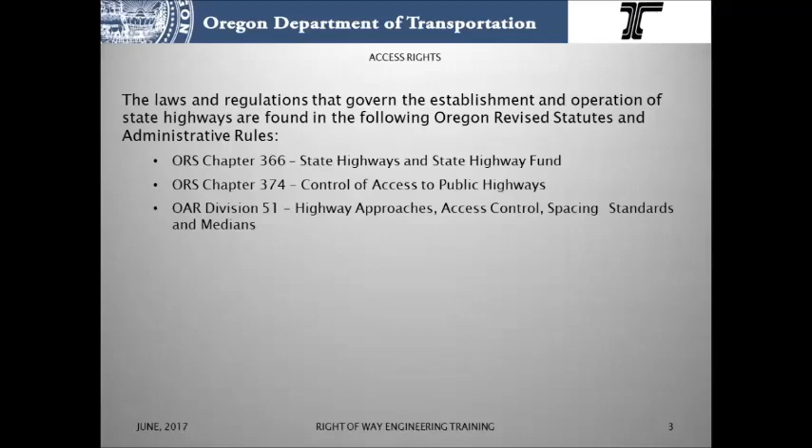Let's start with the administrative rules. In Division 51, 734-051-0020 gives the Department of Transportation the authority to regulate and establish rules that pertain to approaches, access control, spacing standards, medians, and restriction of turning movements.

In 051-1070, there are definitions that you should be aware of. Number one, access control. That means no right of access exists between a property abutting the highway and the highway. Now, this right of access may have been acquired by the department or eliminated by law.

Alternate access means the physical existence of other means to access a property other than the proposed approach, such as an existing public right-of-way, another location on the subject state highway, an easement across the adjoining property, a different highway, service road, or an alley. Now, an approach means a legally constructed approach road or private road crossing, recognized by the department as grandfathered or existing under a valid permit to operate.

A grandfathered approach means a legally constructed approach existing prior to 1949. Now, a property owner has the burden to prove an approach is grandfathered based upon its existence prior to 1949.

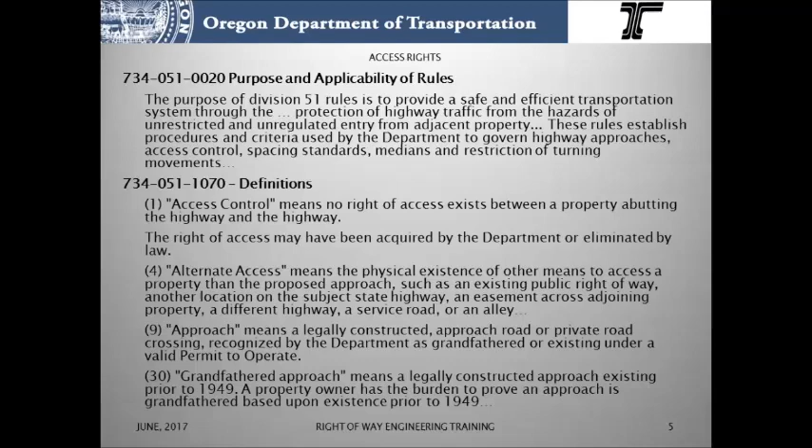Grant of access means the conveyance or evidence of the conveyance from the department of a specific right of access at a location where an abutting property currently does not have that specific right of access.

Indenture of access means a deeded conveyance that changes the location, width, or use restrictions of an existing reservation of access. Reservation of access means a limitation of a common law right of access to a specific location where the department has acquired access control subject to restrictions that are designated in a deed.

A reservation of access may include a use restriction limiting the right of access to a specified use, or a restriction against a specified use. A reservation of access affords the right to apply for an approach, but does not guarantee approval of an application for a state highway approach or the location of an approach.

Now, right of access means the right of ingress and egress to the roadway, and includes a common law right of access, reservation of access, or grant of access. Right of way means real property or an interest in real property owned by the department, as defined in the 1999 Oregon Highway Plan.

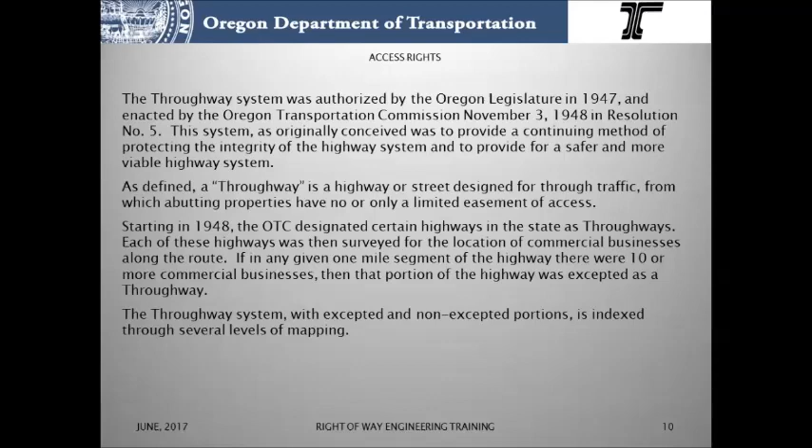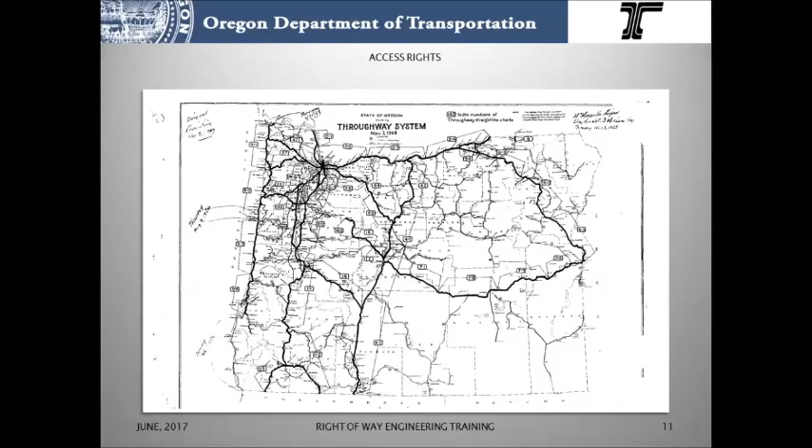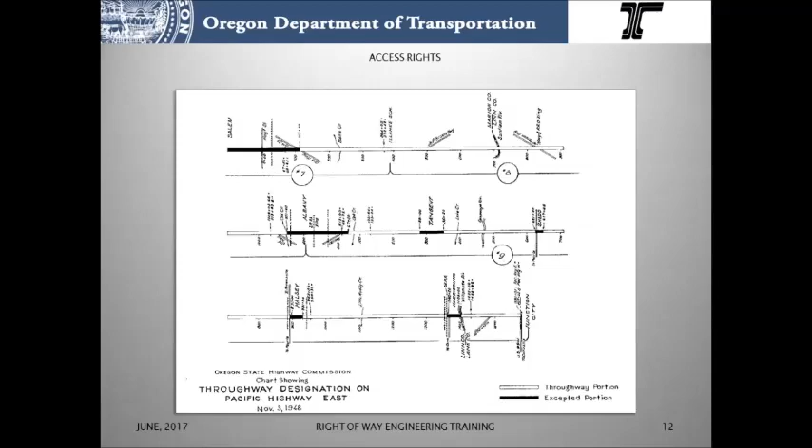374.010, throughway defined. As used in 374.005 to 095, throughway means a highway or street especially designed for through traffic, over, from, or to which owners or occupants of abutting land or other persons have no easement of access, or only a limited easement of access, light, air, or view, by reason of the fact that their property abuts upon the throughway, or for any other reason.

.015 allows the Department of Transportation to establish and maintain the throughways. Any relocated section of an existing highway, and such portions of existing highways which at the time they are designated as throughways have less than 10 commercial businesses abutting thereon catering to the motoring public in any 1 mile of such existing highway, may be designated and constructed as or converted into a throughway.

Now in 035, the Department of Transportation may acquire, by agreement, donation, or the exercise of the power of eminent domain, fee title to, or any interest in any real property, including easements of air, view, light, and access, which in the opinion or judgment of the Department is deemed necessary for the construction of any throughway.

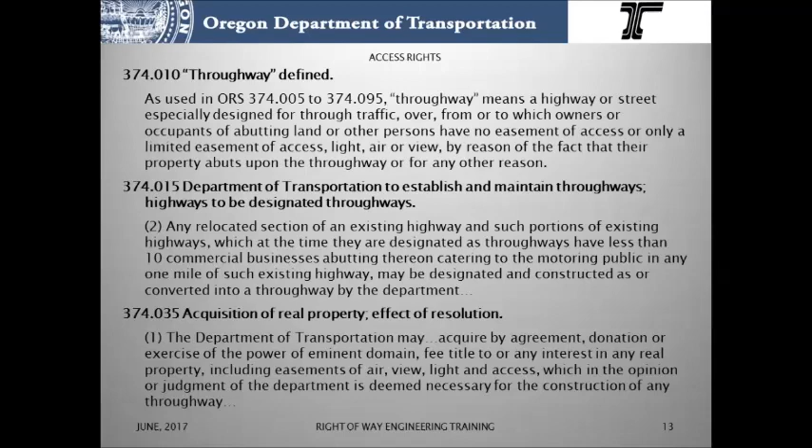Now, 085 and 090 deal with agricultural land. So in 085, severance by throughway of agricultural land: wherever by the location, relocation, establishment, construction, or reconstruction of a throughway, real property, title to which is held under one ownership, is severed and land is being used for farm or other agricultural purposes, provision shall be made by the Department for crossing the highway from one such tract to the other, or compensation for the severance of the tract shall be paid.

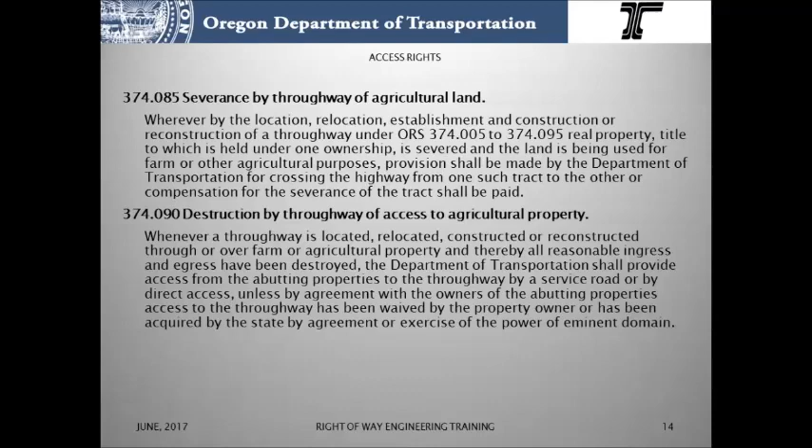This is our farm crossing easements. Now in 090, destruction by throughway of access to agricultural property. Whenever a throughway is located, relocated, constructed, or reconstructed through or over farm or agricultural property, and thereby all reasonable ingress and egress have been destroyed, the Department of Transportation shall provide access from the abutting properties to the throughway by service road or by direct access, unless by agreement with the owners of the abutting properties, access to the throughway has been waived. So this is just a farm access.

Now in 095, utility roads. So we have any existing highway or section of existing highway converted into a throughway. By reason thereof, real properties then occupied and used are affected, and such abutting real properties are dependent upon the existing highway or section of highway for ingress and egress. The Department of Transportation shall provide a utility or service road to serve the properties. This is our frontage road authority.

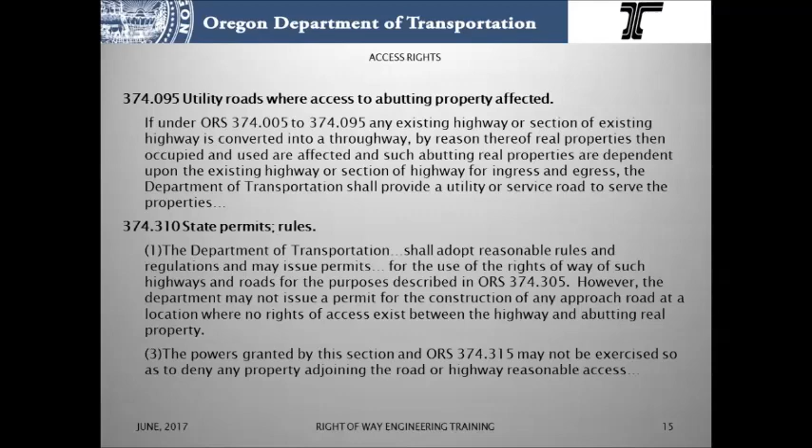And then in 310, this allows the Department to adopt reasonable rules and regulations and may issue permits for use of the rights of way of such highways and roads for the purpose described in 374.305. So basically this gives us the authority to issue permits for approach roads. Now, no abutters' rights of access, the 1951 law.

374.405, access rights of property abutting on state highways. No rights in or to any state highway, including what is known as right of access, shall accrue to any real property abutting upon any portion of any state highway constructed, relocated, or reconstructed after May 12, 1951.

Upon right-of-way, no part of the width of which was acquired prior to May 12, 1951, for public use as a highway by reason of the real property abutting upon the state highway. And ORS 410, in connection with any acquisition of real property for right-of-way of any state highway, the Department of Transportation shall prescribe and define the location, width, nature, and extent of any right of access that may be permitted by the Department to pertain to real property described in 374.405.

So what this means: we have a new highway route. We're taking off from an existing highway, relocating through new lands, a new route. That 1951 law specified that the abutting property owners have no right of access to the new route, but we can specify a reservation if needed.

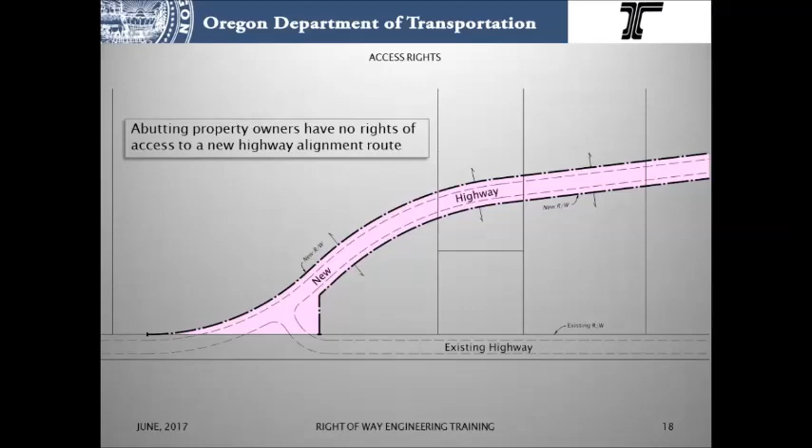So regardless of a property owner's common law rights, an adjoining property owner must always obtain a permit from ODOT to access the highway. In addition to ODOT's acquisition of any property rights or the effect of state laws, the regulatory permitting power gives ODOT full authority to manage and control all highway access.

The type of access rights, if any, that are to be acquired are identified and noted in the addenda information for the acquisition file. Key phrases are used that tell the document specialist the specific access language to put in the deed for each parcel of the description.

So the access language that is used is: none, restricted to highway, controlled to highway, restricted the parcel, controlled the parcel, uncontrolled frontage road, controlled frontage road, restricted frontage road, controlled to highway with future frontage road, ORS 374.405 no abutters rights of access complete restriction to highway, ORS 374.405 no abutters rights of access with reservation of access granted, joint access, farm crossing, and undercrossing.

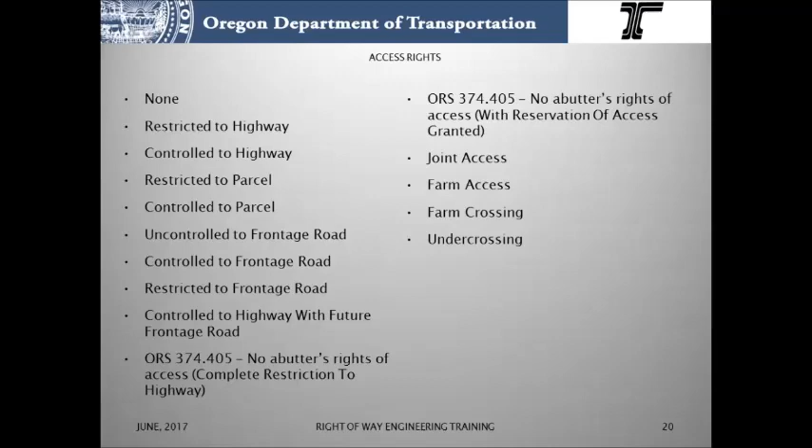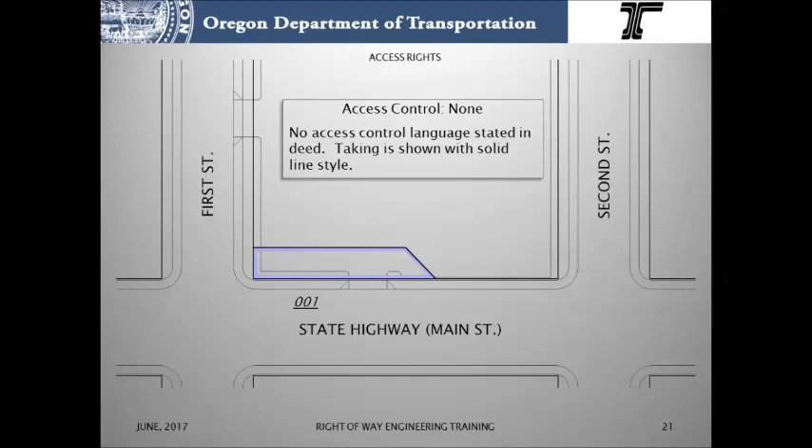Let's take the first one. Access control: none. No access control language is stated in the deed. The taking is shown on the map with a solid line style.

So there's the addendum note that the writer is going to put in the addendum. It says parcel number, access language: none. And no specified access language goes in the deed.

Application of this is all existing access rights, if any, between the grantor's remaining real property and the highway will remain. If ODOT has never purchased any access rights from this property, then highway access will continue to be regulated solely by ODOT's permit process.

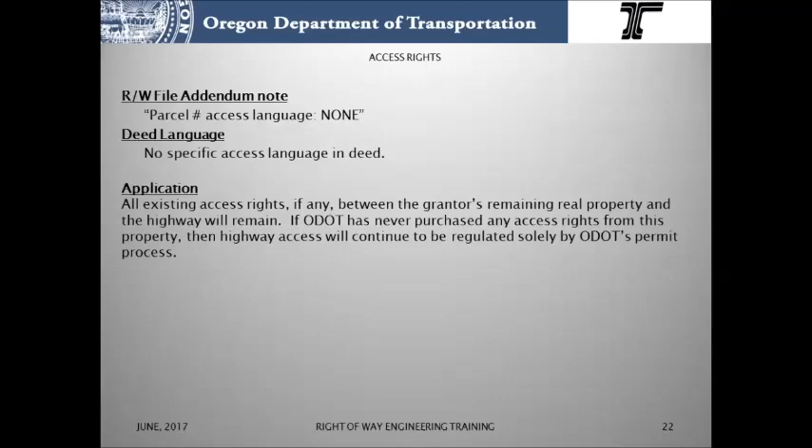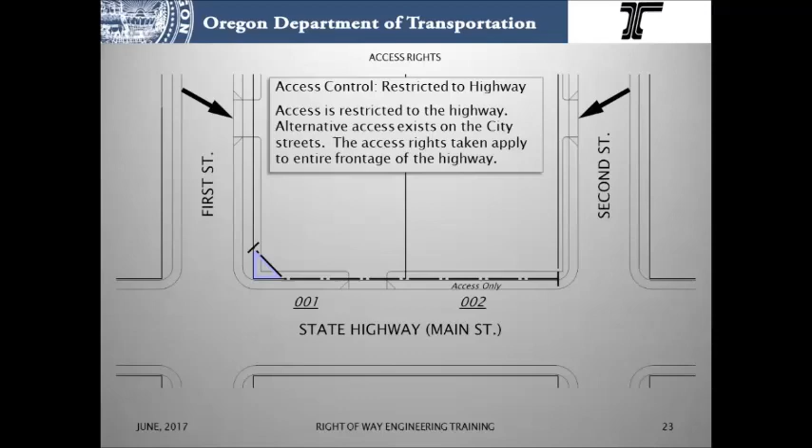Now we have access control restricted to highway. So access is restricted to the highway. Alternative access exists on the city streets. The access rights taken may apply to the entire frontage of the highway. Access rights that are taken may be incorporated with a fee-taking parcel, or it may be a separate access-only parcel.

So with file 1, we have a small triangular shaped fee take, but we're acquiring the rights to access along their entire frontage. With file 2, it's just an access-only file. There's no other taking.

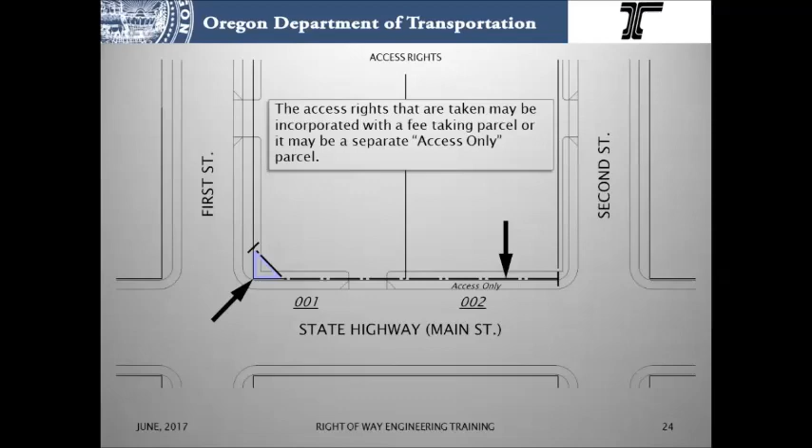So the note on this is parcel number, access language: restricted to highway with the highway name. That clues into the document specialist. They put this deed language in the deed: together with all abutters' rights of access between the name of the highway and grantor's remaining real property.

Our application is no access reservations are identified. Access between the grantor's remaining property and the highway is completely prohibited. The grantor's property can only be accessed from another public road or street. This is the method for eliminating access rights between the grantor's property and the highway when the parcel does not span the full frontage of the property.

Next one, access control: controlled to highway. So we have no alternative access to the properties that exists. So a reservation of access is granted in the deeds.

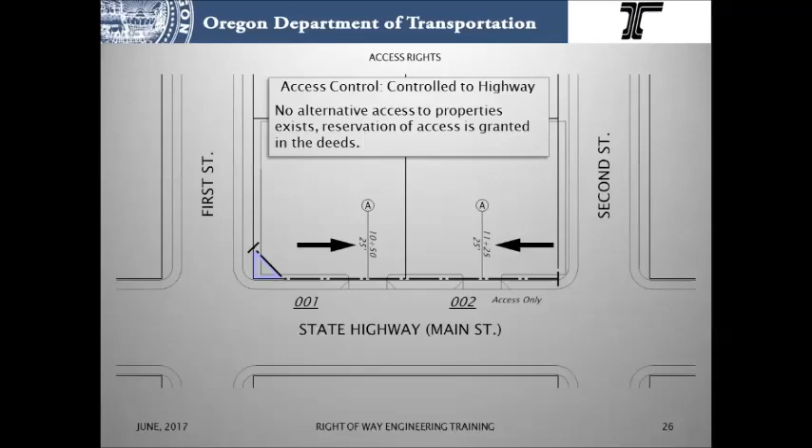The note for this one is parcel number, access language: controlled to highway with the highway name. The deed language that goes in is: together with all abutters' rights of access between the name of the highway and grantor's remaining real property, except however, and then we put in reservation language, reserving access rights for the service of grantor's remaining property to and from said remaining property to the abutting highway at the following place or places in the following width or widths.

We have the engineer station identified, which side of the highway, and the width of the approach. So the application of this one is all access rights between the highway and grantor's remaining property with reservations of access. Project team is to provide the reservation stations, which side of the highway, and the width of the reservations.

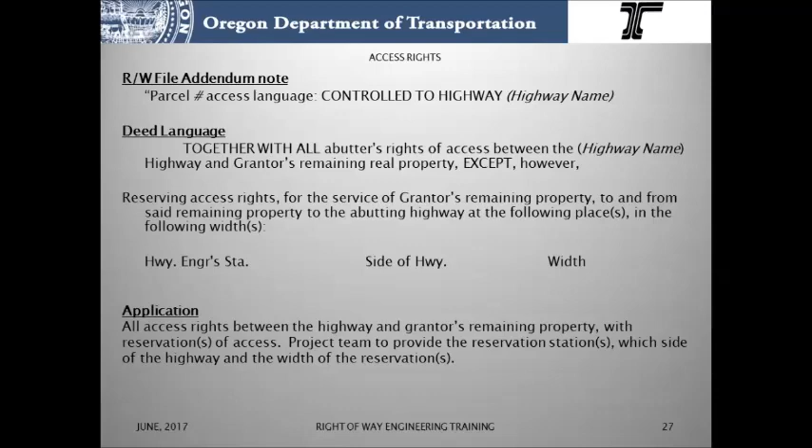Next one, access control restricted to parcel. So access restricted to the parcel. There is alternative access that exists on the city street.

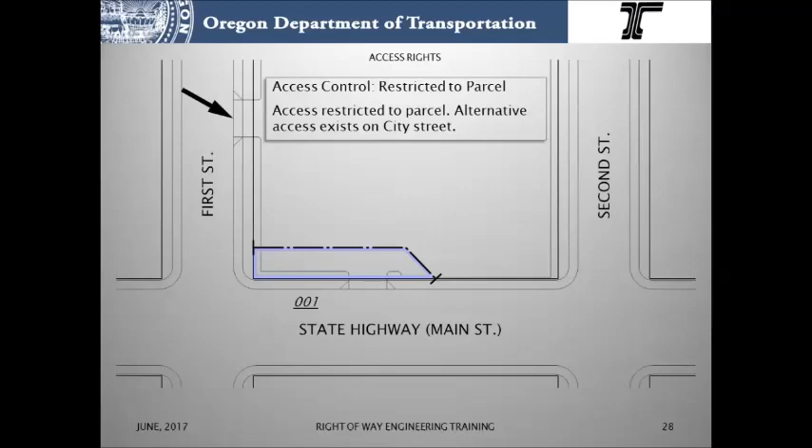The addendum note: parcel number, access language, restricted to parcel. The deed language that goes in is together with all abutters' rights of access between the above described parcel and grantor's remaining real property. The application: no access reservations are identified.

Access between the grantor's remaining property and the parcel is completely prohibited. All existing access rights, if any, that are not via the parcel will remain. This is the method for eliminating only the access rights through the parcel when the parcel does not span the full frontage of the property.

This is the preferred method for eliminating all access rights between the grantor's property and the highway when the parcel spans the full frontage of the property.

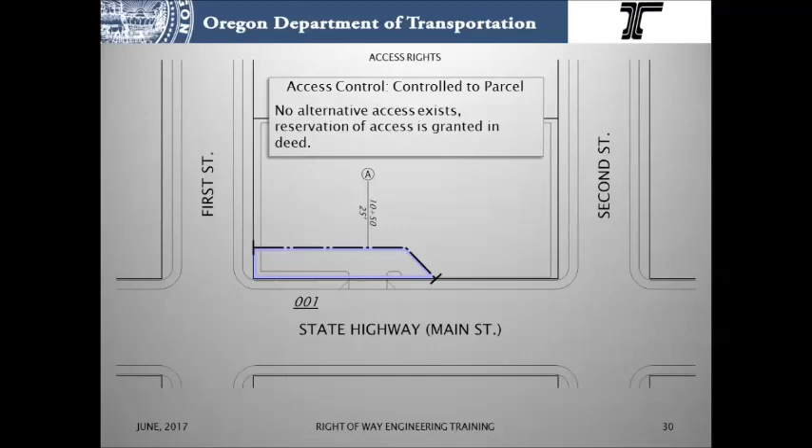Next one, access control, controlled to parcel. No alternative access exists. A reservation of access is granted in the deed.

The note: parcel number, access language, controlled to parcel. The deed language is together with all abutters' rights of access between the above described parcel and grantor's remaining real property, except, however, and then we have the reservation language with the station, which side of the highway, and the width. So the application: all rights between the described parcel and grantor's remaining property with reservations of access.

Project team to provide the reservation stations, which side of the highway, and the width of the reservations.

So access to a frontage road is addressed as with access to the highway. It can be restricted, controlled, or uncontrolled. The access language notes for frontage road to be entered in the addenda information for the acquisition are: uncontrolled the frontage road, controlled the frontage road, restricted the frontage road.

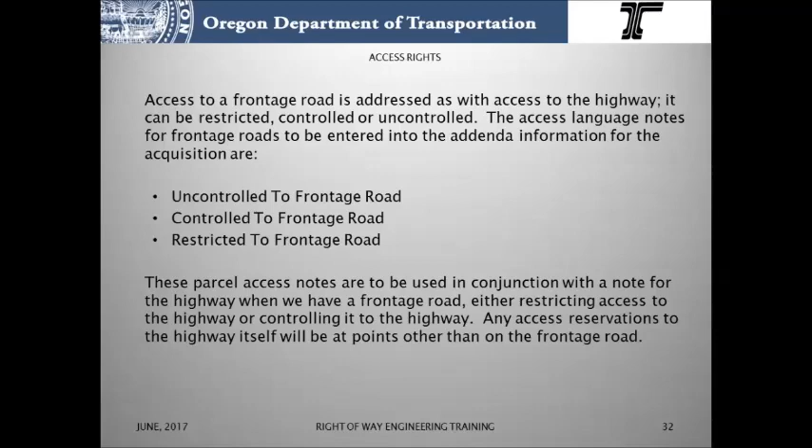These parcel access notes are to be used in conjunction with a note for the highway when we have a frontage road, either restricting access to the highway or controlling it to the highway. Any access reservations to the highway itself will be at points other than on the frontage road.

So the first one we have, access control: restricted the highway, uncontrolled the frontage road. All access rights between the highway and grantor's remaining property with access uncontrolled to a public frontage road to be built during the project or some other public access road.

The addendum note: parcel number, access language, restricted the highway with the highway name, uncontrolled the frontage road. So the deed language that goes in: together with all abutters' rights of access between the name of the highway and grantor's remaining real property, except, however, grantee shall either construct a public frontage road or provide some other access road on the, and then it's a direction, side of the highway, and grantor and grantor's heirs, successors, and assigns

shall be entitled to access to said road for any purpose upon application filed with grantee and issuance of a road approach permit pursuant to applicable statutes and regulations. Said road shall be connected to the main highway or to other public ways only at such places as grantee may select.

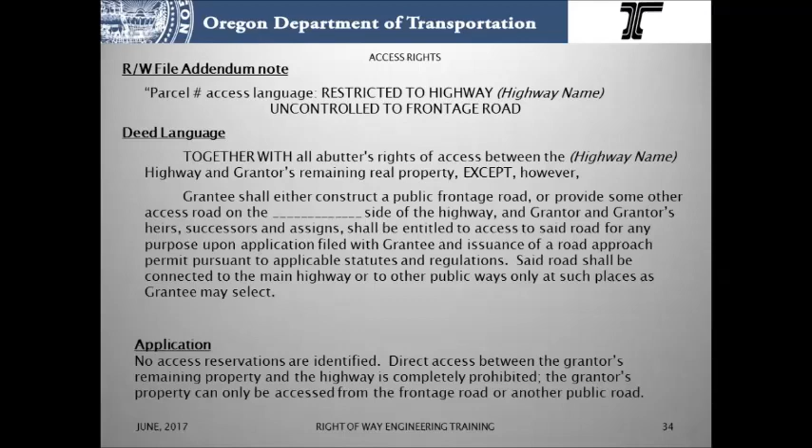Next one is access control, restricted the highway, controlled the frontage road. So access to the highway allowed only via a public frontage road. Reservation of access granted to the frontage road.

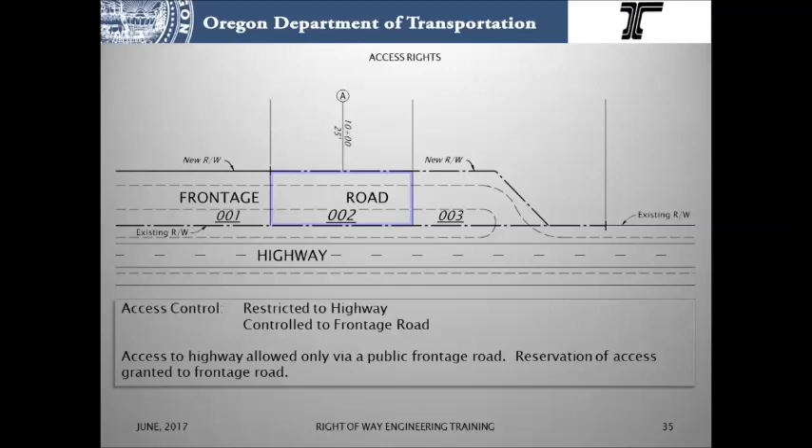Okay, the access note: parcel number, access language restricted the highway with the highway name, controlled the frontage road. The deed language is together with all abutters' rights of access, if any, between the highway name and the grantor's remaining real property. Also together with all abutters' rights of access, if any, between the frontage road and grantor's remaining real property,

except, however, then we're reserving access rights for the service of grantor's remaining property to and from said remaining property to a public frontage road or other public access road, which grantee shall construct at the following place and the following widths. And then we have the station, which side of the highway, and the width.

Application on this: all access rights between the highway and grantor's remaining real property with access controlled to a public frontage road or some other public access road to be built during the project. The team provides the reservation station, the side of the highway, and the width.

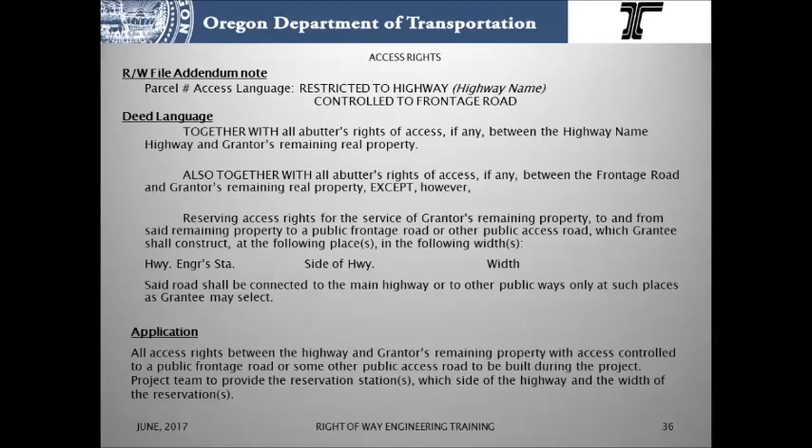Next one is access control, restricted the highway and restricted the frontage road. And with this one, the access to the highway and the frontage road is completely restricted.

The addendum note: parcel number, access language, restricted the highway with highway name and restricted the frontage road. Deed language: together with all abutters' rights to access between the highway with the highway name and constructed public frontage road or other public access road and grantor's remaining real property.

Application is all access rights between the highway, including the constructed public frontage road or other public access road, and grantor's remaining property.

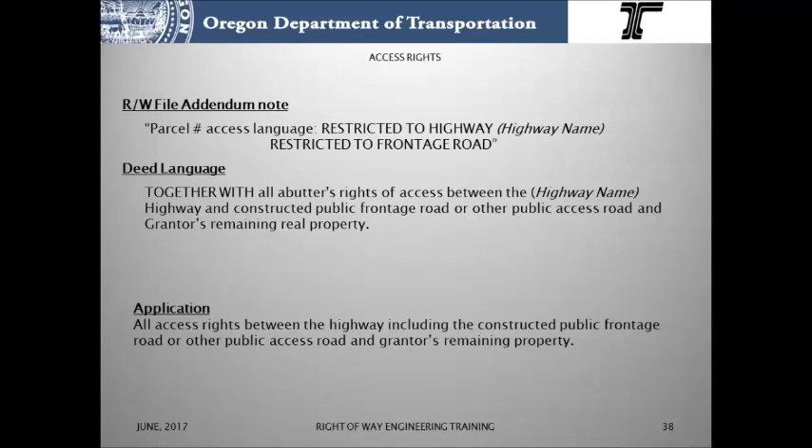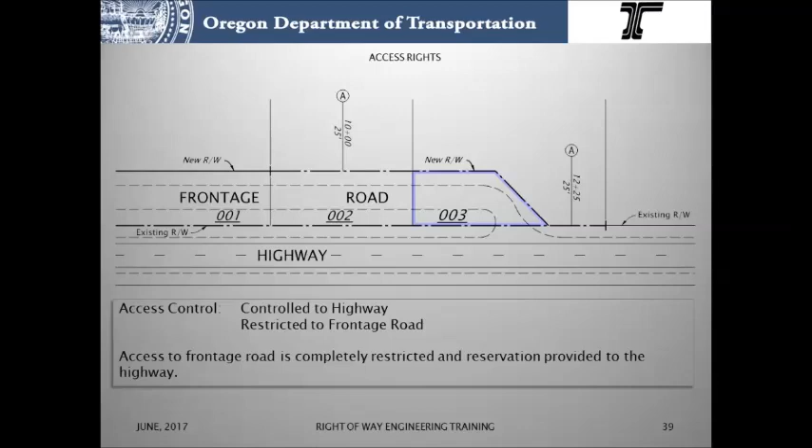This one controlled the highway and restricted the frontage road. Access to the frontage road is completely restricted, with reservation provided to the highway. The note is parcel access language: controlled the highway with the name of the highway, restricted frontage road.

Deed language: together with all abutters' rights of access between the named highway and constructed public frontage road or other public access road and grantor's remaining real property, except, however, reserving access rights for the service of grantor's remaining property to and from said remaining property to the abutting highway at the following place and widths. So all access rights on this one are between the highway and public frontage road or other public access road and grantor's remaining real property, with a reservation of access to the highway.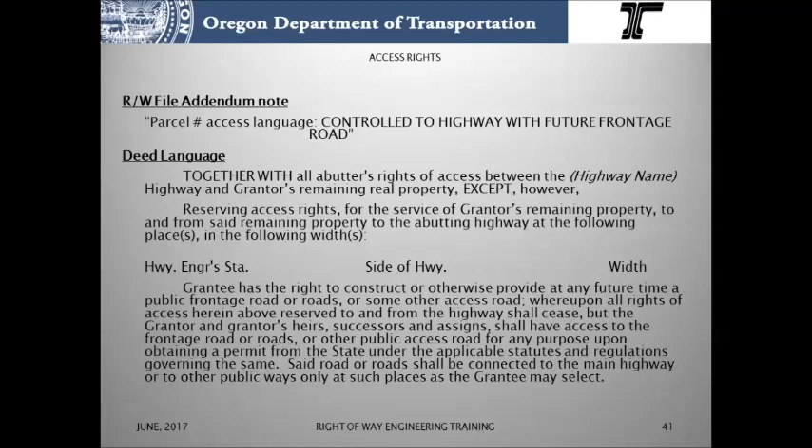Application of this one: the grantee has the right to construct a future frontage road or other public access road, at which time all reservations to the highway shall extinguish, and grantor will be granted a reservation to the constructed frontage road or public access road. The project team is to provide the reservation station, the side of the highway, and the width.

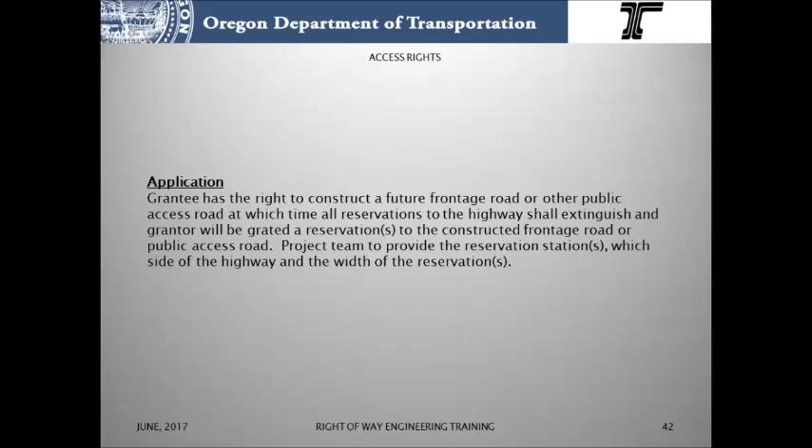Now we go into access control, joint access. Property A and Property B share a common driveway, and no alternative access exists. The reservation is granted serving both of the properties.

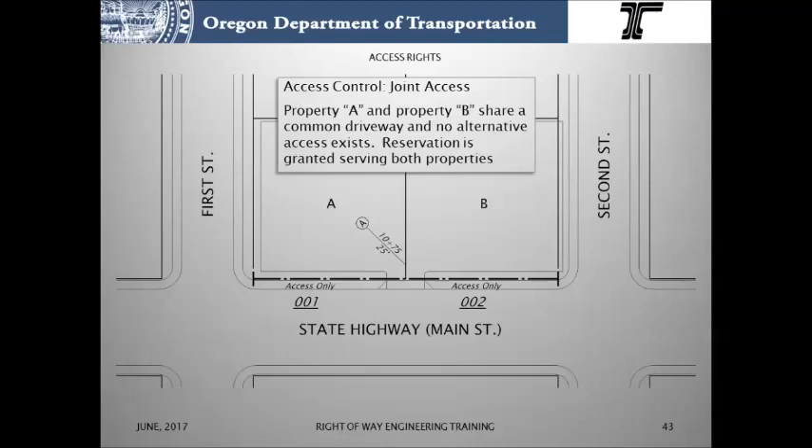The note on this one is parcel access language, controlled highway, with the highway name, with joint access. The deed language is: together with all abutters' rights of access between the named highway and grantor's remaining real property, except, however, reserving access rights for the service of grantor's remaining property to and from said remaining property to the abutting highway at the following place and widths.

Standard reservation language there. Additional note: it is specifically understood that the access rights opposite highway engineer station, with the station specified, are to be used and enjoyed in common with the adjoining property owners on the north, south, east, or west, who currently is/are, and then the name of the adjoining property owner.

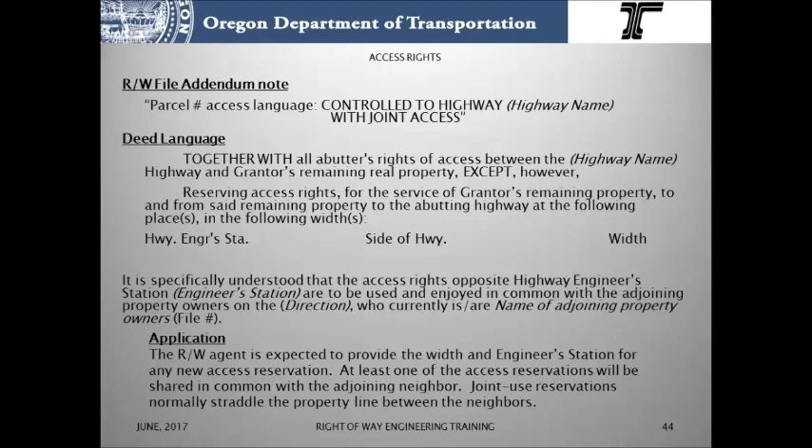So the application here is that the right-of-way agent is expected to provide the width and engineer station for any new access reservation. At least one of the access reservations will be shared in common with the adjoining neighbor. Joint use reservations normally straddle the property line between the neighbors.

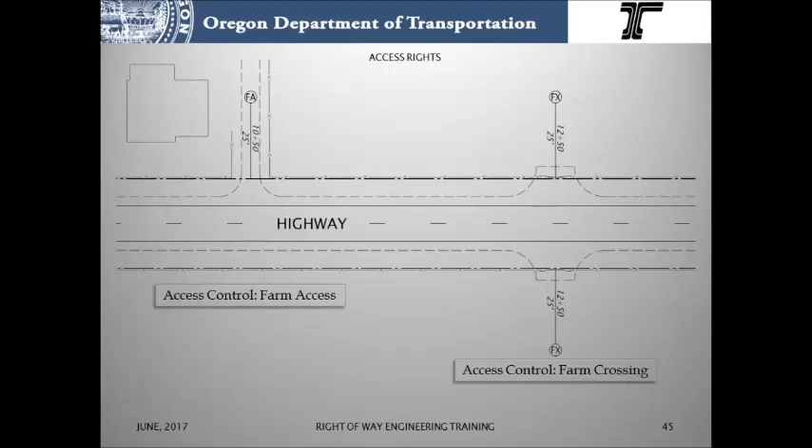Now we have farm access and farm crossing. The addendum notes are parcel number, access language, controlled highway with the highway name for farm access, or controlled highway, highway name, for farm crossing.

Application on this one is similar to a standard right-of-way acquisition that establishes an access reservation, except a specific purpose is identified for the use of the access reservation. The deed language will state that it is either for farm access or farm crossing only. Any other uses will be prohibited.

Later lifting of either of these use restrictions will require a grant of access. Normally, there is a clause in the deed for a farm crossing that automatically extinguishes the access rights if and when there is not a unity of ownership on both sides of the highway. Farm crossing reservations should be in pairs at the same engineer station on opposite sides of the highway.

Access control, ORS 374.405, no abutter's rights of access, complete restriction to the highway, or access control.

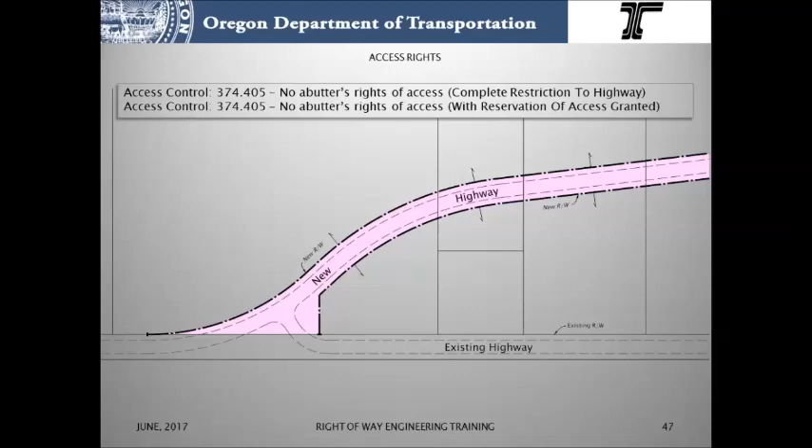ORS 374.405, no abutter's rights of access with reservation of access granted. The addendum note covers the parcel number access language.

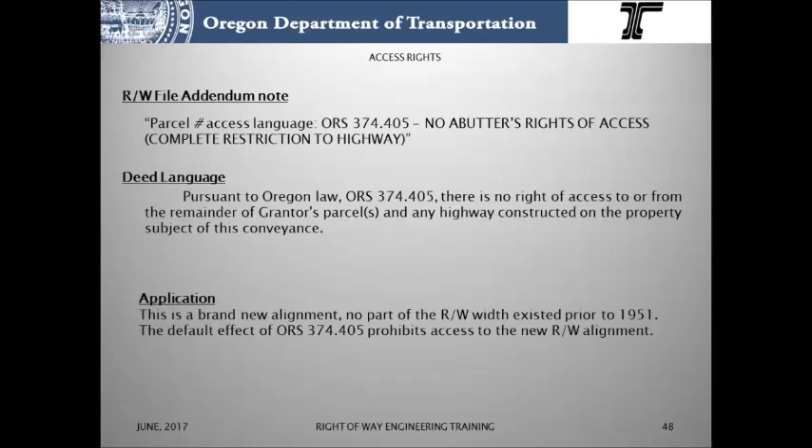The deed language is, pursuant to Oregon law ORS 374.405, there is no right of access to or from the remainder of grantor's parcels and any highway constructed on the property subject of this conveyance. So the application, this is a brand new alignment. No part of the right-of-way width existed prior to 1951. The default effect of 374.405 prohibits access to the new right-of-way alignment.

The second one, parcel number access language, ORS 374.405, no abutter's rights of access with reservation of access granted. Deed language is pursuant to Oregon law 374.405, there is no right of access to or from the remainder of grantor's parcels and any highway constructed on the property subject to this conveyance, except, however, and then we have the standard reservation language.

Application, we have a brand new alignment. No part of the width existed prior to 1951. This phrase is used only when ORS 374.405 applies, and there is to be a reservation or reservations of access granted. The project team, again, needs to provide the station, the side of the highway, and the width.

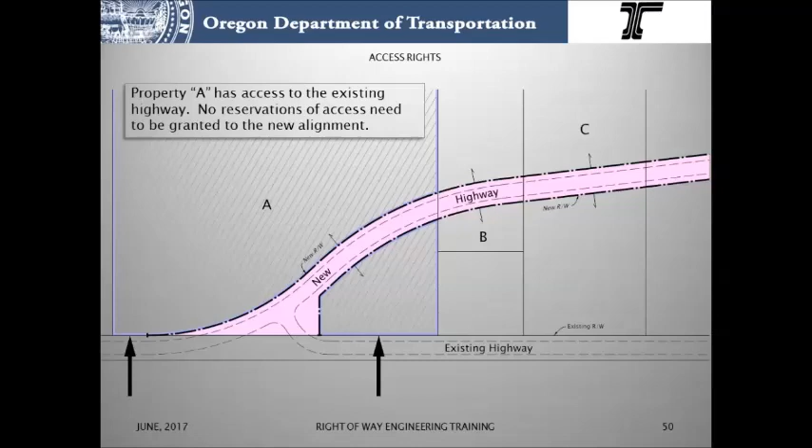So how does this apply? On property A, they have access to the existing highway. No reservations of access need to be granted to the new alignment.

Now, property B does not have access to the existing highway. If alternative access does not exist for the northerly portion of the property, then a reservation must be granted or the property purchased. On the south side, if no alternative access exists for the southerly portion of the property, a reservation of access must be granted or the property purchased.

Property C does not have access to the existing highway on the northerly portion of the property. A reservation of access must be granted if no alternative access exists, or the property purchased. The southerly portion of the property has access to the existing highway, and a reservation of access does not need to be granted to the new alignment for the southerly portion.

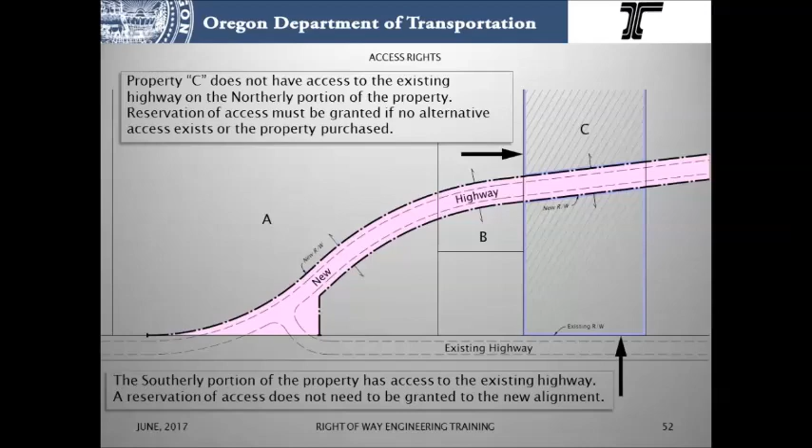Access control undercrossing. An undercrossing reservation is granted to cross under the highway. The crossing is usually associated with a bridge or a culvert.

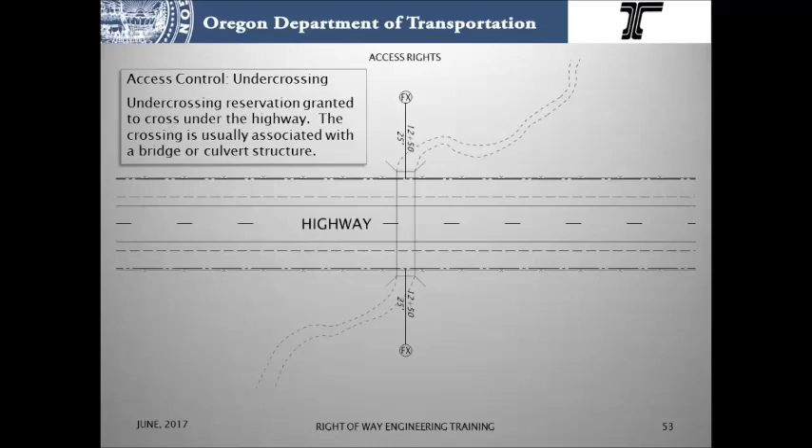The addendum note, parcel number, access language, undercrossing. The deed language: together with all abutter's rights of access between the name of the highway and grantor's remaining real property, except, however, grantor reserves the right to cross beneath the highway structure at engineer's station, with a station specified, in widths to be determined by permit to serve remaining property on the specified sides of the highway.

Grantor shall be liable for any damage to the highway structure incurred as a result of the exercise of this crossing right. The application for this one is similar to a reservation for farm crossing. The deed language will state the allowed uses for the undercrossing; any other uses will be prohibited. The under-highway road may only be constructed or maintained upon issuance of a permit and in accordance with such permit.

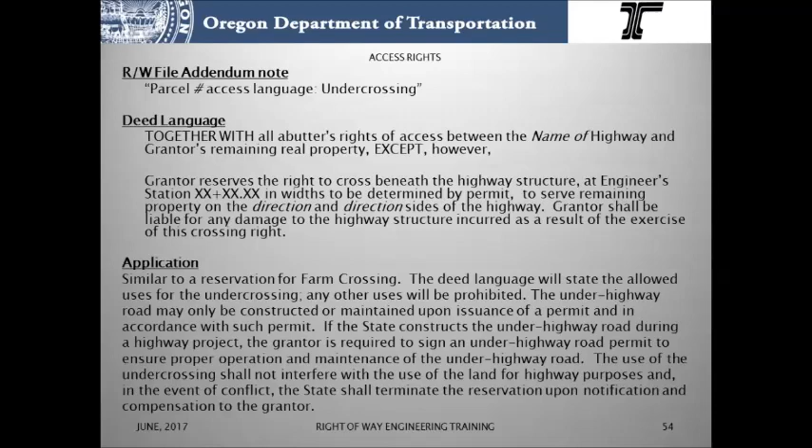If the state constructs the under-highway road during a highway project, the grantor is required to sign an under-highway road permit to ensure proper operation and maintenance of the road. The use of the undercrossing shall not interfere with the use of the land for highway purposes, and in the event of conflict, the state shall terminate the reservation upon notification and compensation to the grantor.

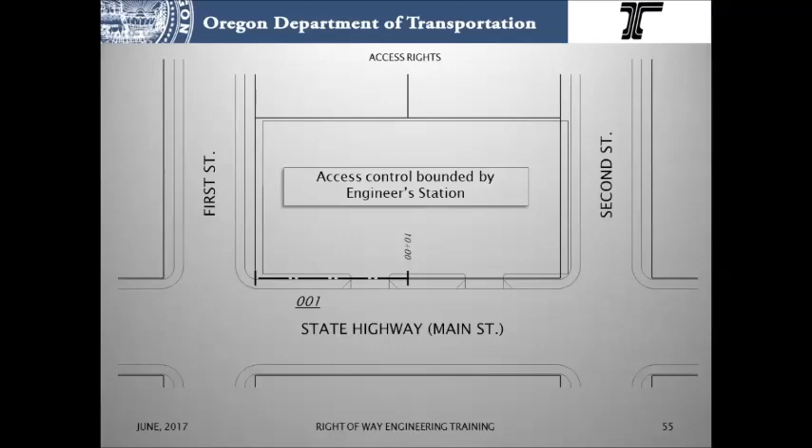Access control bounded by engineer station. A note for this one: parcel number access language, completely restricted to the highway, with the name of the highway, and the direction of engineer station with station specified.

Or parcel access language, completely restricted to the parcel and direction of engineer station with the station specified. This method is used for restricting the access rights between the grantor's property and a portion of the frontage of the highway or the parcel. The restriction of access rights is from a specified cardinal direction of a specified engineer station. All existing access rights to the highway or to the parcel, if any, outside of the frontage being restricted, will remain.

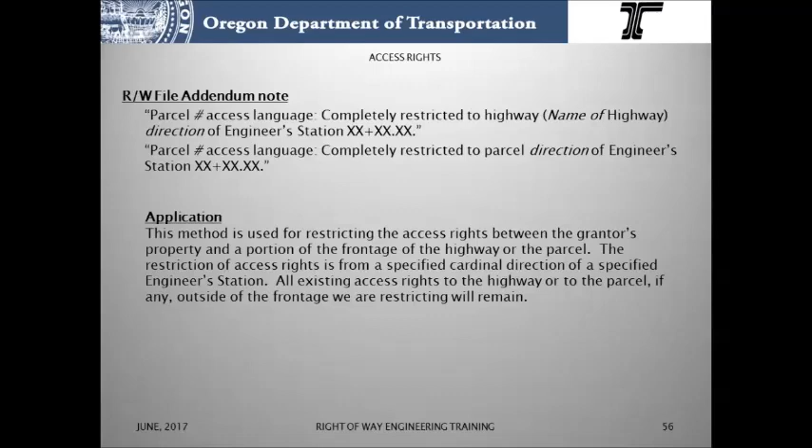And we have controlled parcel number access language: controlled to highway with the name of the highway and the direction of and the specified station, or controlled to parcel, direction of the station.

This method is used for limiting the access rights between the grantor's property and a portion of the frontage of the highway or the parcel. The limitation of access rights is from a specified cardinal direction of a specified engineer station. Access between the grantor's remaining property and the highway or the parcel frontage being controlled can only be through an access reservation. The right-of-way agent is expected to provide the width and engineer station for any new access reservation. All existing access rights to the highway or to the parcel, if any, that are opposite the specified direction of the engineer station will remain.

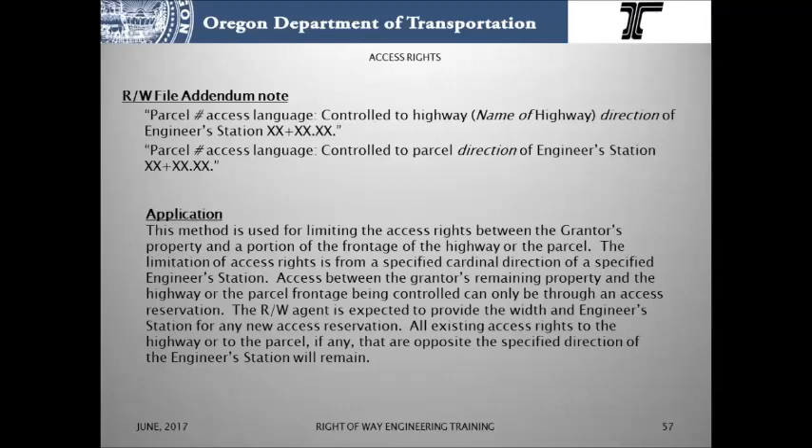And that concludes access rights. For more information on right-of-way engineering, refer to the Right-of-Way Engineering Manual, available on the ODOT website.